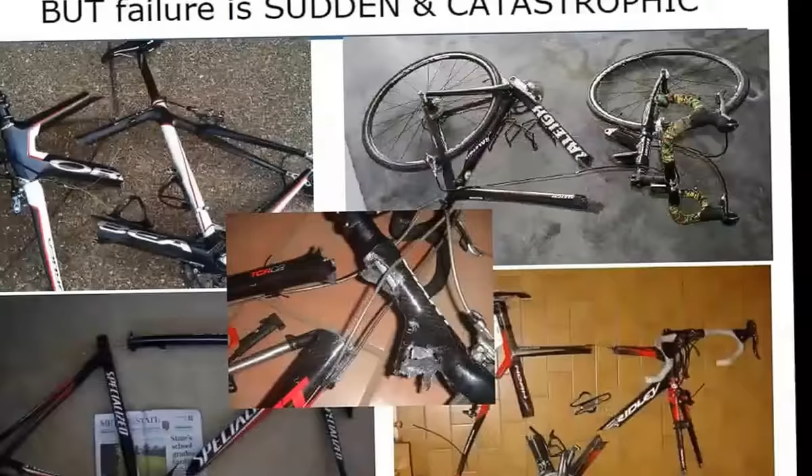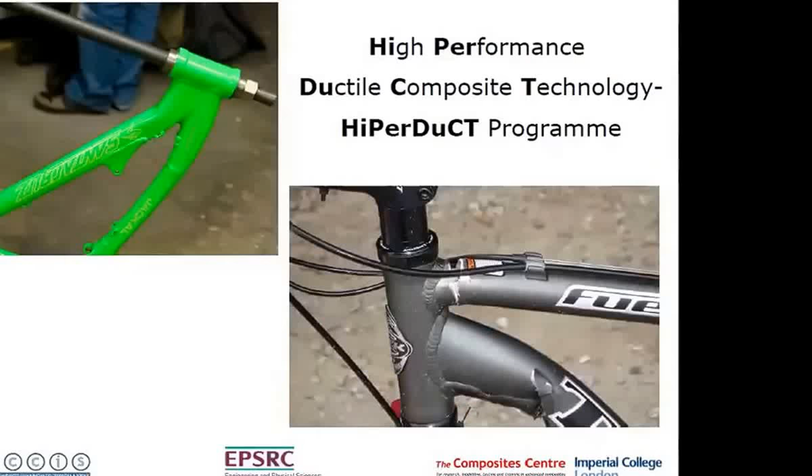Okay, right. So carbon fibre epoxy composites - they're wonderful materials, very stiff, very strong, lightweight - but the snag is that when they do go, it tends to be with a bang and you get a lot of broken pieces. So that's really the key challenge of this HiPerDuCT program: to really look at that problem and see what we can do differently to try and overcome that limitation. So the question really was, can we actually achieve some sort of ductility in these materials, which are typically very brittle?

So that was the basis for this HiPerDuCT program, which was on high-performance ductile composite technology. It's a joint program between Bristol and Imperial, with quite a number of postdocs and PhD students over a number of years, following various different streams. I'm only going to touch on some of the work this morning that came out of that project.

So really, what we wanted was the benefits of composites in terms of performance, high performance, but some of the advantages of metals. For example, an aluminum alloy, which shows this nice gradual response with a ductile failure. Can we actually marry those in some way and get the benefits of both of those characteristics?

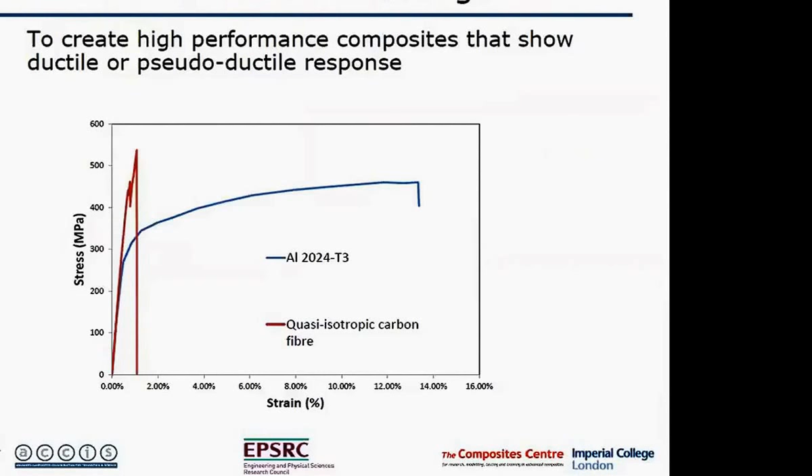So on this project, we've looked at various different approaches to achieving ductility or pseudo-ductility at different scales. One area is by looking at fiber reorientation, so you have angle plies, and then you pull them up, and you get a scissoring effect. You can generate additional strain, additional excess length, which can produce strain on top of the basic elastic strain of the fiber. That's one way where you can produce some non-linearity and some pseudo-ductility. Not going to talk about that today.

The second mechanism is by using strength dispersion, getting actual failure within the material, and one of the mechanisms there is ply fragmentation, and that I'm going to talk about extensively over the next half an hour.

We can also generate additional strain by having discontinuous fibers, different discontinuous composites, where we get a slip interface. That again can yield additional strain, and we've done quite a bit of work on that. But again, I'm not going to cover that this morning. And then the Holy Grail, which is ductile fibers. Some of the work at Imperial College was looking at producing fibers which themselves exhibit a ductile response, and they got some very interesting initial results on that as well.

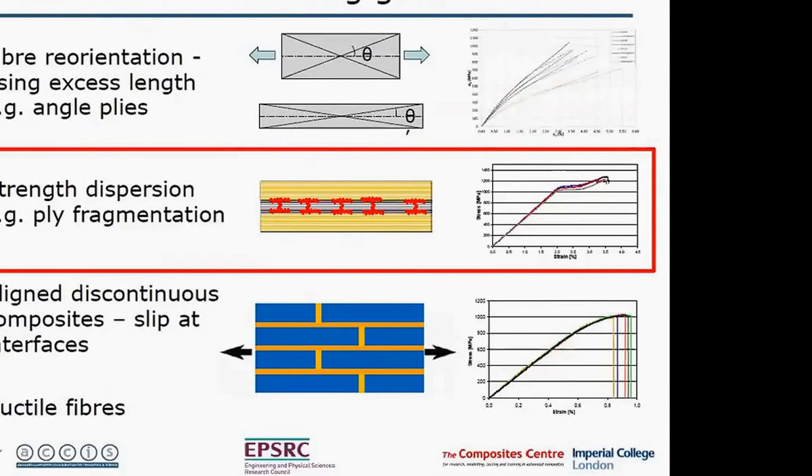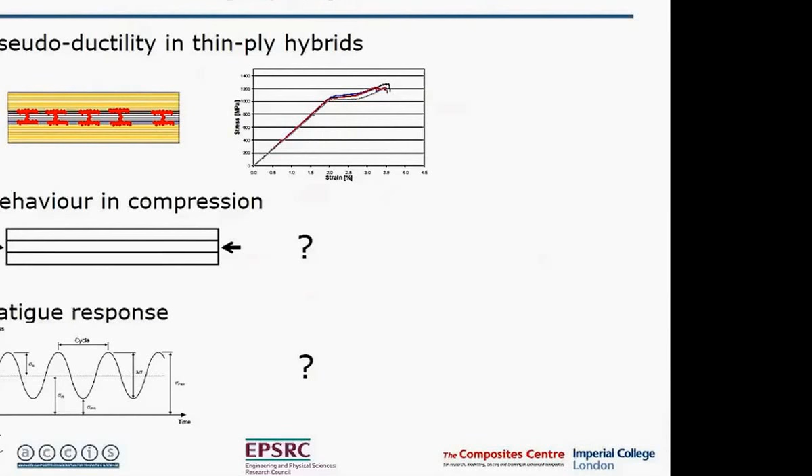So for this presentation, I'm going to talk about this main mechanism, the strength dispersion, and in particular, I'm going to look at hybrid composites. How can we generate ductility through having thin-ply hybrids? We've done a lot of work over that over the years. I'm going to summarize briefly some of the results on tension. Much of the work earlier on was done looking at tensile response, but what I want to focus on a bit more today is the behavior in compression of these hybrid composites, and also how they behave in fatigue.

So, pseudo-ductility in hybrid composites. In a hybrid composite, you start off with a high strain material, for example glass, which has a lower modulus but a higher strain to failure, and then you have a low strain material, which might be carbon, which has a higher stiffness but a low strain to failure. You put them together to form a hybrid, and if you do it right, you can get this sort of stress-strain characteristic, whereby you get an initial elastic response, and then you can get a plateau-type behavior as this pseudo-ductility mechanism comes in.

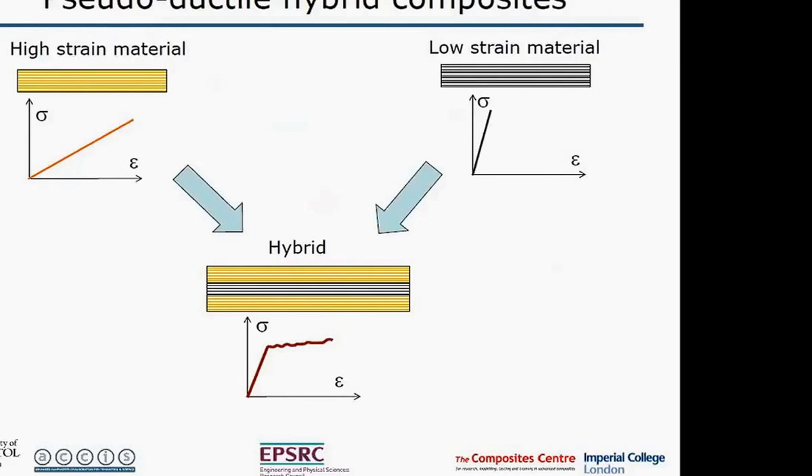But you only get that if you do things in a particular way. That's not the typical response of normal hybrid composites. So it all depends on the way that they fail, and understanding the failure mechanisms and tailoring them so that you get that response is absolutely key, and that's what we've been extensively researching for this project.

So hybrid composites can fail in different ways depending on their configurations. Just thinking if I can put this up here, if I'm not too far from the microphone. Yeah.

So, let's assume this is a carbon-glass hybrid, so we've got carbon in the middle and glass on the outside. If we have too much carbon, then when you load it, as soon as the carbon breaks, the whole thing fails, and you get a catastrophic failure. So you get a linear elastic response, as you would for a normal composite material, then catastrophic fiber failure. If you use less carbon or more glass, then when the carbon breaks, you just get a catastrophic delamination. So again, you get a load shock at that point.

However, if you use thinner plies, you can suppress the delamination. And with thin plies and with the right ratio of carbon to glass, you can get a situation where after you get one failure in carbon, you can then get another failure, and you get this multiple fragmentation behavior.

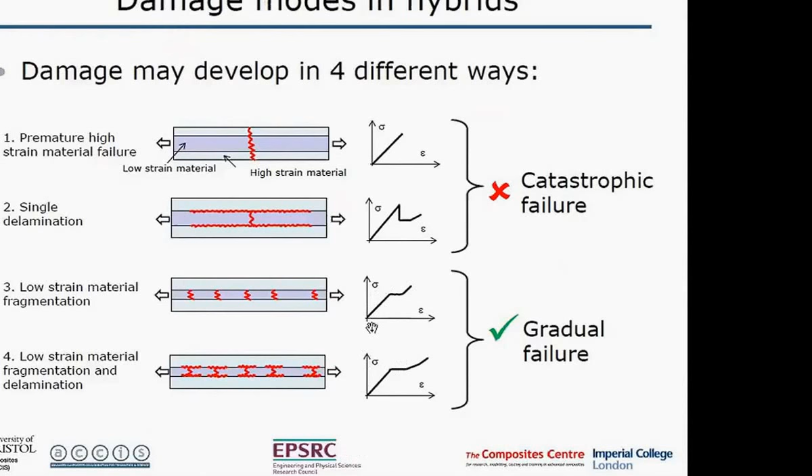And in some cases, accompanied by a little bit of localized delamination. That gives you this plateau on the stress-strain curve and this gradual failure as a result of this fragmentation taking place within the carbon. So that's the mechanism we want—this plateau on the stress-strain curve—and we can achieve that by the right combination of properties to get that fragmentation behavior.

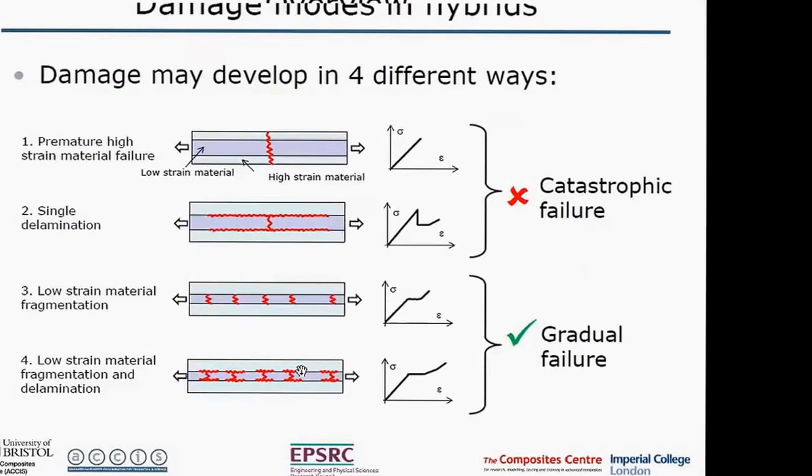We've done a lot of modeling of this, and this damage mode map shows parameters which control it. So there are two main things which control the hybrid behavior. One is the layer, the absolute thickness of the carbon, because that's what controls the delamination. And one is the proportion of glass and carbon.

So if we have too much carbon, then we get this catastrophic premature failure of the whole thing when the carbon breaks. On the other hand, if the carbon is too thick, then we get this delamination mechanism. But if we have sufficiently thin carbon and not too much of it, then we can get either this pure fragmentation mechanism or this fragmentation with localized delamination. And that's what gives us a pseudo-ductile response.

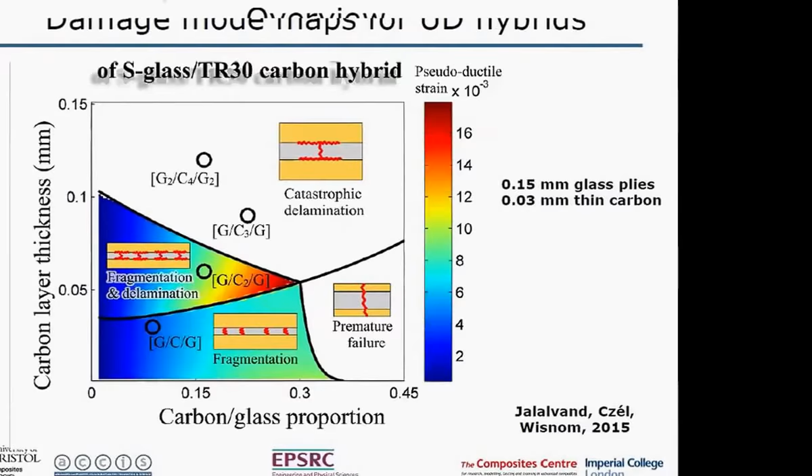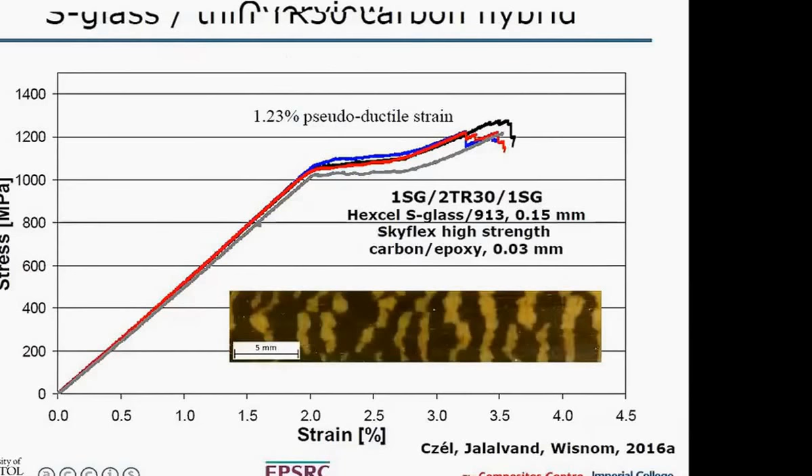So this shows one example here, where this is the same material, which is S-glass, standard thickness, with these thin TR30 high-strength carbon fibre plies. And you see we get this plateau here on the stress-strain response, with in this case 1.23% pseudo-ductile strain. We're defining the pseudo-ductile strain as the extra strain we get over and above what you would have with an elastic response at that same stiffness. So the distance on this plateau is what we're referring to as the pseudo-ductile strain.

One of the other things which is interesting about this type of material is that you get this striped pattern here. The material is originally black. When it fails, you can just about see these cracks in the middle of these regions here. These are the cracks in the carbon, and then you get a little bit of localized delamination, and that produces this stripe pattern. Because once you get a bit of delamination associated with those carbon fragments, the interface within the material reflects the light, and you get this yellow pattern.

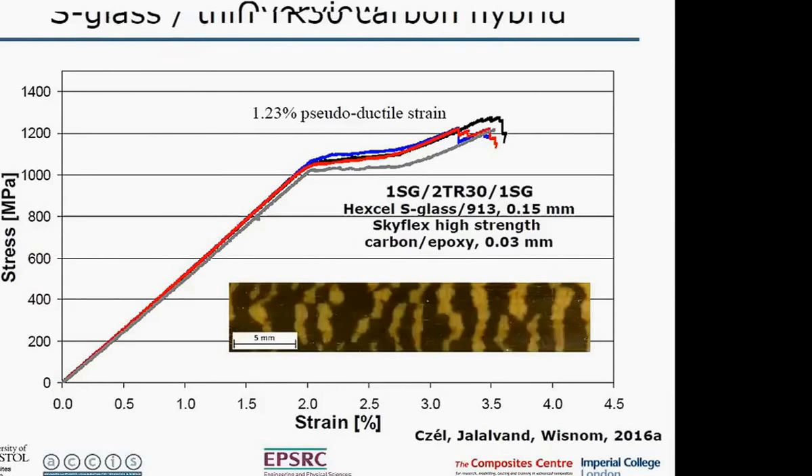So this is quite interesting because as well as generating the pseudo-ductility, it can be used as an overload sensing mechanism. This is something we've also been doing quite a lot of work on, how we can exploit that to not only get this pseudo-ductile response, but to actually have either a surface layer on the structure which indicates overload, or a discrete sensor which can be bonded on. It can be bonded onto metal structures, or it can be composite, to give an indication when a certain strain has been exceeded. It can also be used for looking at fatigue response as well—that's a whole other story which I'm not going to talk about today.

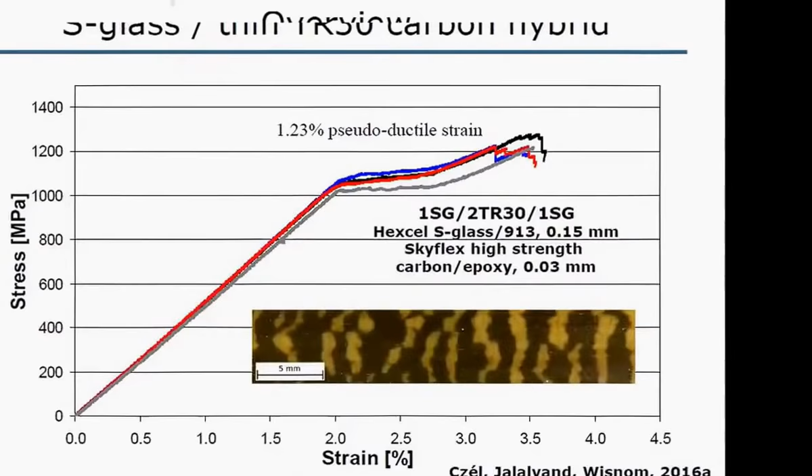You can do the same thing with, okay, this just shows what happens when you unload it. It's actually a different combination of materials, but when you load it and then unload it, initially up to about 1.5% strain it's just elastic, there's no damage, it just goes back down the same line. When you exceed the fragmentation strain, when you exceed the strain where the carbon breaks, then you've got a reduced stiffness because you've got damage.

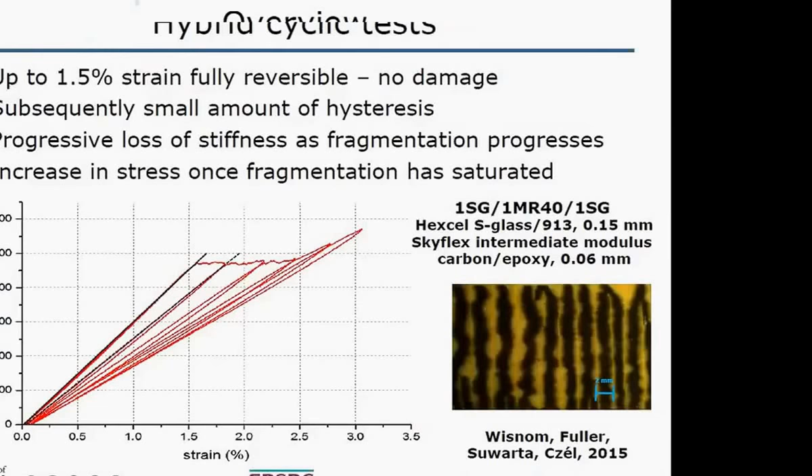So this is pseudo-ductility. It's not true ductility, it's pseudo-ductility because we've got damage, so we've got a reduction in stiffness and a little bit of hysteresis. Then when you get to the end of this plateau, where fragmentation is saturated, the stress starts to pick up again. This is where we're getting additional stress carried by the glass after the saturation of this fragmentation mechanism.

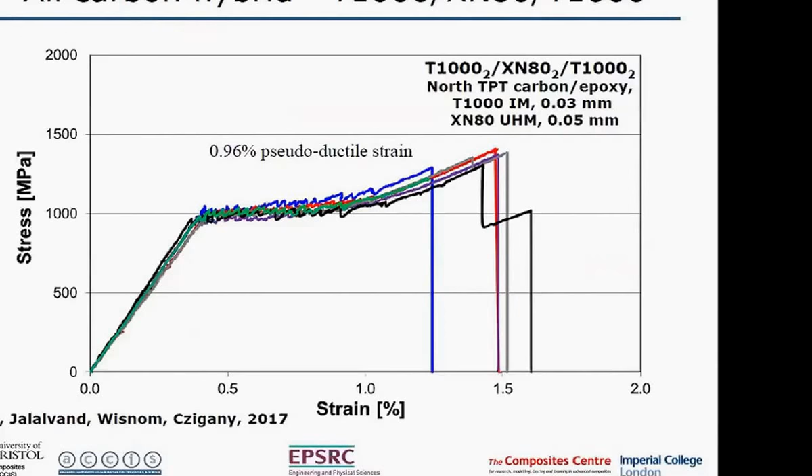So that's with the glass carbon. But we can do the same thing with different grades of carbon. This plot here shows an all-carbon configuration where we've got T1000 and XN80. XN80 is a very high modulus fiber, and we've got that sandwiched between T1000, which is an intermediate modulus, high strength fiber, and you see we get the same sort of pseudo-ductile response with initial elastic response, this plateau where we get fragmentation, and in this case about 1% pseudo-ductile strain.

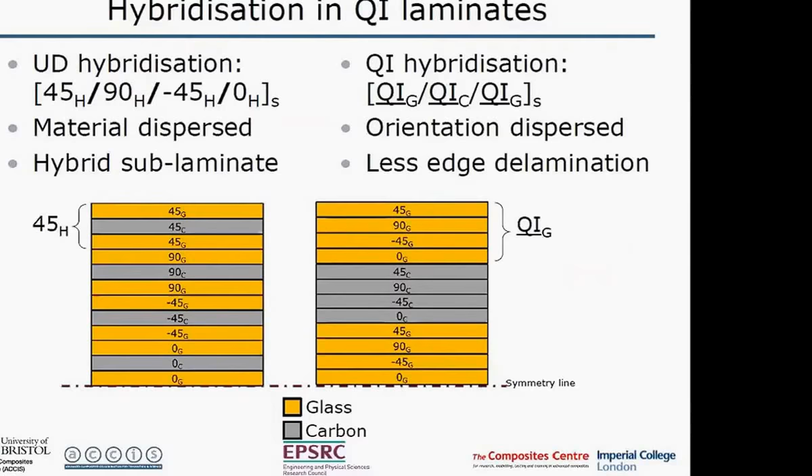But I'm going to show you some results now from this configuration. So here we've got actually a 0 plus or minus 60 configuration where we've blocked with glass together. So we've got a block of glass, quasi-isotropic, and a block of carbon. This glass is standard ply thickness, this carbon is thin-ply, and then we get the same sort of non-linearity with a bit of a plateau region here, similar to what we saw with the UD.

So what we see with the unidirectional composite carries across to what we see in the quasi-isotropic. And it's interesting to see we can load it in any of the directions and get a similar sort of response, although there is a bit of a difference between this red one, which is loaded in the 0 direction, and the ones which are loaded at 60 degrees.

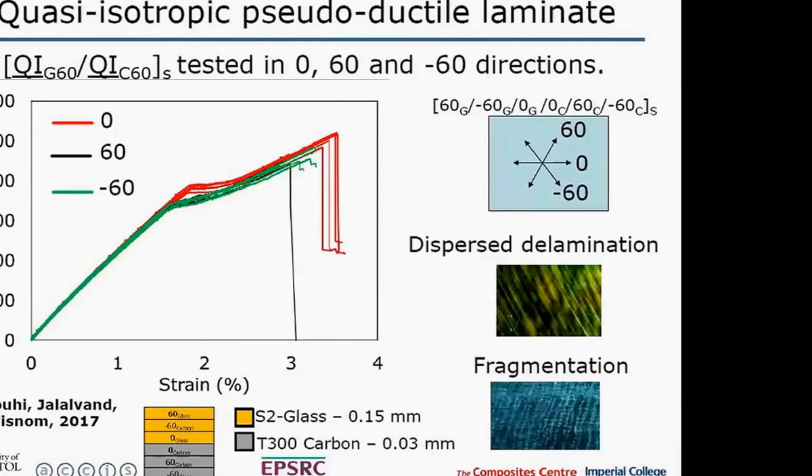And that's another very interesting phenomenon which I could spend the whole time talking about related to hybrid effects. One of the other things we see with these hybrid composites is that we can see an increase in strain at failure in the carbon, and that's because the glass adjacent to it actually inhibits the formation of critical fiber clusters. We get an increase in the strain at failure, which can be quite significant - it can be at least a 10% increase in the strain at failure.

In this case, in the 0 configuration, that 0 carbon is next to a 0 glass, and that produces a higher hybrid effect than if it's in the other configuration, where the 0 is actually next to a 60, and therefore it doesn't get quite so much constraint when the adjacent plies load, and you get that difference in the failure strength. So that's a whole other interesting thing that's come out of this program, understanding hybrid effects and how we can take advantage of them to actually get higher strengths of failure in the carbon in these hybrid configurations.

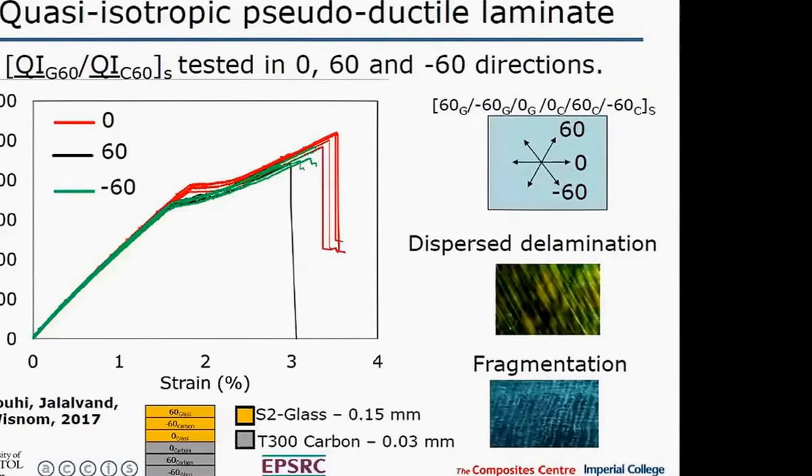So we can get a quasi-isotropic response with pseudo-ductility in any direction, and indeed off-axis we also get a pseudo-ductile response as well. And we get the same sort of failure mechanisms that we see in the UD, with dispersed delamination and fragmentation occurring in the plies.

One of the whole points of this was to see what happens when you go to a notch response, because the thinking behind this pseudo-ductile response was that if you've got this ability to redistribute load, it should be less sensitive to notches than conventional carbon fiber composites, which show a big reduction in static strength when you put a notch in them, a stress raiser.

And that's exactly what we see. This is open hole tension and sharp notch response on the same quasi-isotropic laminate I showed before. The red is the unnotched response, as we had before. Now if we put a hole or a sharp notch in it, we see the same response up to this point, and then we get failure.

So the important thing is that the failure is occurring locally, fragmentation is occurring locally at the hole much earlier, right down here. At this point we've got enough stress at the edge of the hole to start it fragmenting, and then all along here we're getting gradual fragmentation and load redistribution, until once the whole section has fragmented, we get failure of the whole thing.

So this pseudo-yield stress is reached quite early on, then we get a gradual increase in fragmentation around the notch. On these plots you can see what we're actually seeing is the delamination associated with that. Even at this strain there's quite a bit of fragmentation which you can't see so much, but it's gradually increasing until you get pseudo-yielding across the whole cross-section, at which point you get the load drop.

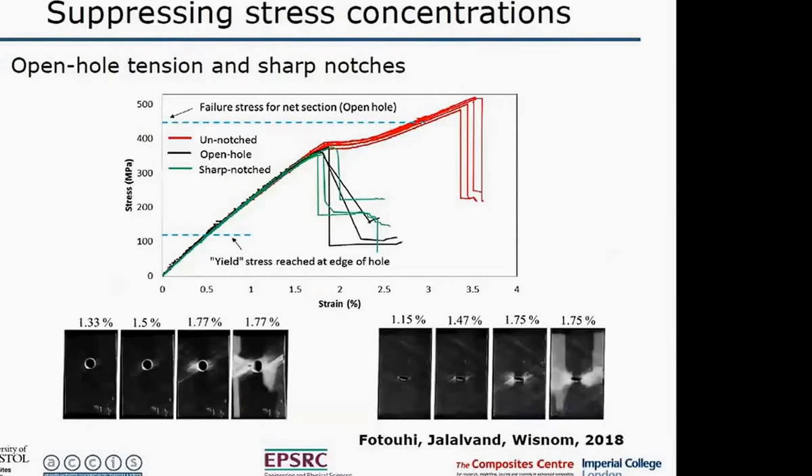So this was pleasing. This was the whole premise of the program, that by introducing the pseudo-ductility we could reduce the effective stress concentrations, and it seems to work very well.

So then the next question is, what happens in compression? When we started this program, we thought this is a good thing — we've got a pseudo-ductile response in tension, but surely it's not going to work in compression, because you haven't got the same mechanism of fragmentation, or have you?

So we initially investigated that using these beam specimens — a 4-point bending test with a 2.7 millimeter glass epoxy beam with a layer of hybrid on the surface. Here we've got a glass-carbon hybrid just on the compression surface, the same material we looked at before, with standard glass applied on the surface and 0.06 millimeter of M55 high modulus carbon underneath it. We put it under 4-point bending and measured the curvature using dots on the edge of the specimen, then used that to determine the strain and look at the overall response.

And what happens? Well, we do get fragmentation. We get this change in slope — the M55 fiber failure stress in compression is about 0.5% strain, and you can see at this 0.5% we see a change in slope due to fragmentation, and then it goes up to 2% where we're getting overall failure occurring. So we are getting this change in slope due to fragmentation in the carbon, which was initially a bit of a surprise. We weren't necessarily expecting this to work in compression, but it does.

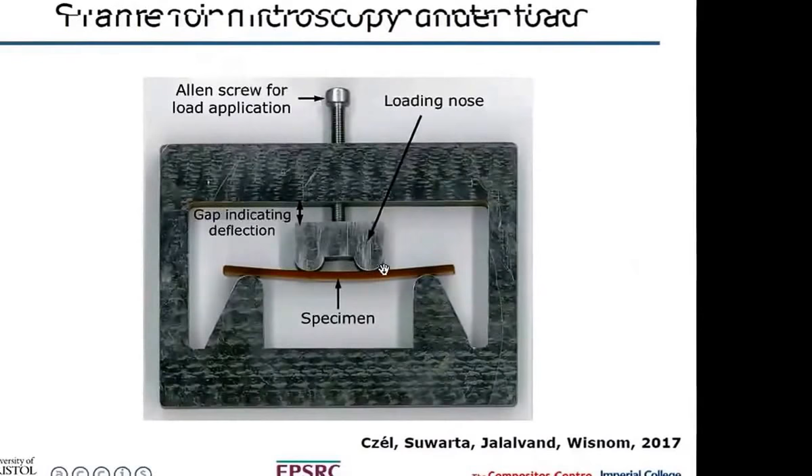And what's going on? Well, we investigated this using a little rig here to enable us to put the specimen under load and see what's happening when it's under load, so we could put it under the microscope to look at the mechanisms, what's actually happening in the fragmentation.

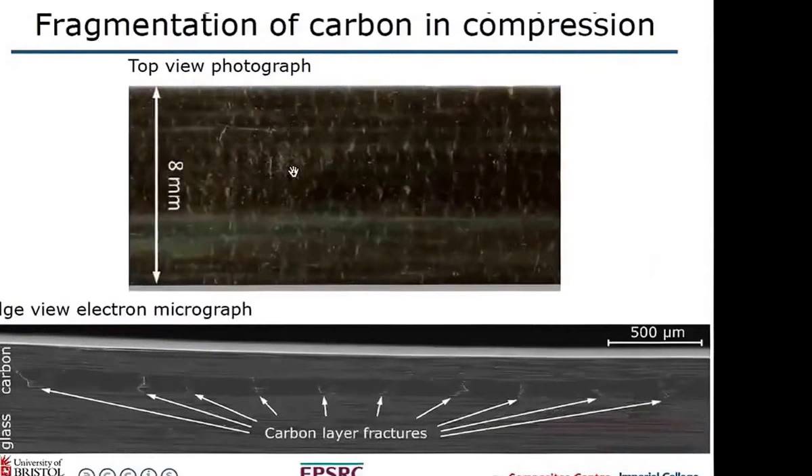This shows the overall top view. You can see, not quite so clear as in the tension case, but you can see these little flecks, which are fragmentation and local delamination associated with those fragmentation events in compression. On the bottom here you can see the surface ply when it's under load, at about 1.2% strain. You can see these fragmentation events periodically along the length of the carbon ply — we're getting the same sort of fragmentation in the carbon even when it's loaded in compression. The pitch of these fragments is quite close.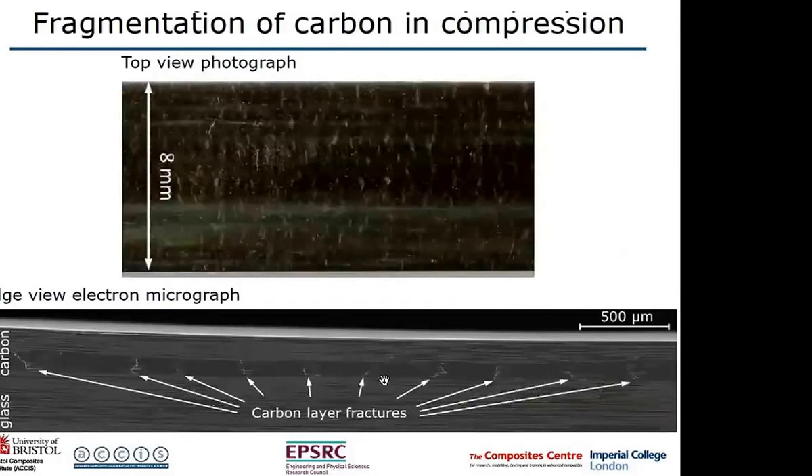We measured that. If you do a typical calculation for tension using a shear lag type equation, working out what length is needed to get the load into the fibre, you find the critical ply length is about 1 millimetre. But actually the distribution of these fragments is much less, about 0.5 millimetre on average, with some going down to 0.2 millimetre or less. So these fragments are much, much closer together than that critical length.

What that tells you is that these fragments do not affect the load carrying. It's still got carbon, it's still carrying load. It's not like it's completely unloaded here - you've got to load it up by shear to get enough load in to break it again. It's still carrying load and therefore can break at the next weak point along the ply, where the critical failure mechanism can start.

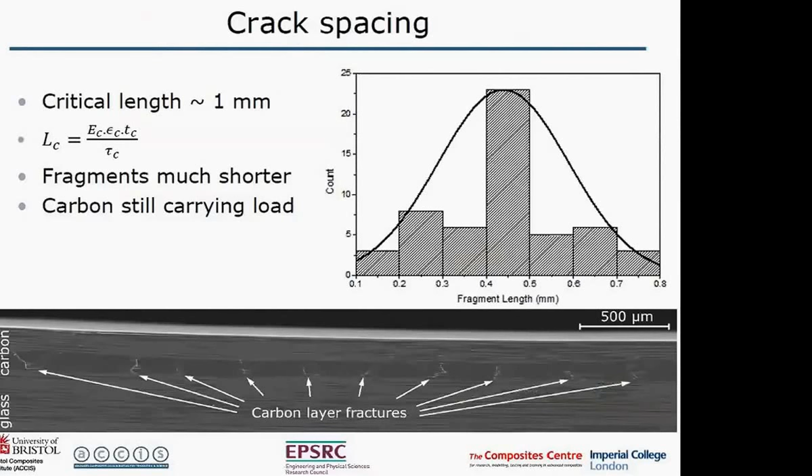So if the carbon still carries load, how does the fragmentation work? It was a bit of a puzzle at first. If you look at this plot here, using this rig, we can look at it unloaded, and then load it up, in this case to minus 1.2% strain.

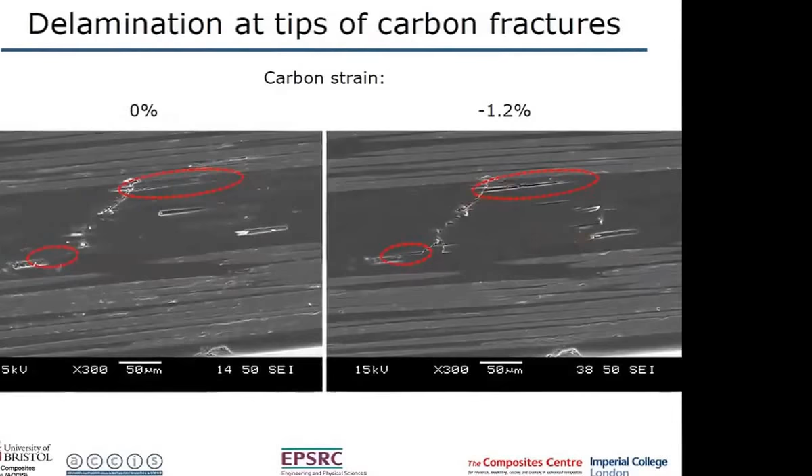So you can see here, this is the fragmentation crack. The fibers have broken at an angle - a bit variable, but it sort of looks like a shear crack. At the top here, if you compare this one with over here, you see it's opened up - there's a bit of a delamination crack down here. The fibers are broken in compression, and because of that angle, they're able to force each other apart to get a little bit of localized delamination.

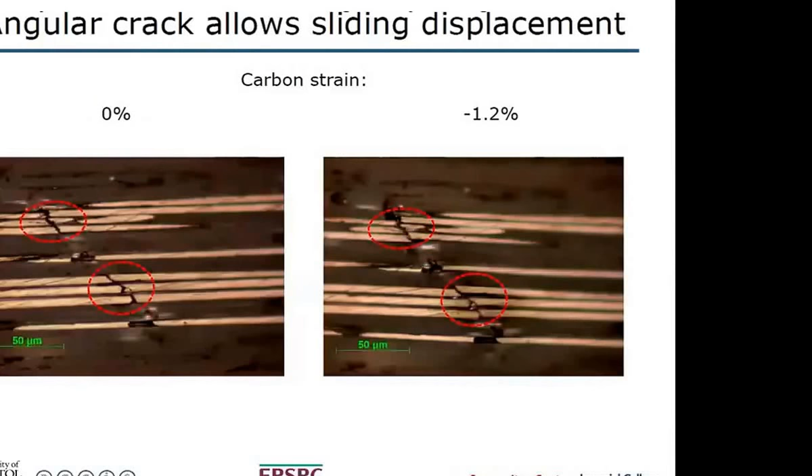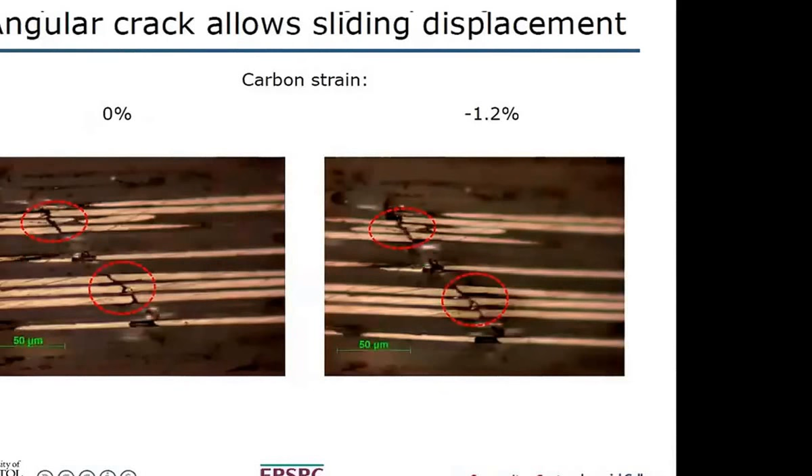If you look at this lower fragment, on the left-hand side you can see the orientation of the fibers. And if you look at this one, you can see how it's moved upwards versus this one. But also, because of that roughly 45-degree angle, it's moved in this direction as well. So you can see how that wedging action, pushing out this way and producing a bit of delamination, enables a change in strain in the fiber direction to occur. That's the mechanism by which this fragmentation behavior can occur.

Looking at it schematically, this angled crack, when you've got sliding occurring across it, pushes the composite apart here. You get a little bit of delamination, mixed mode delamination here. That allows some relative motion, which allows the strain to change even though the load is not changing very much. As this fragmentation progresses, the carbon is still carrying about the same load as when it started to fragment, but it can strain because this mechanism allows relative motion while still carrying the load.

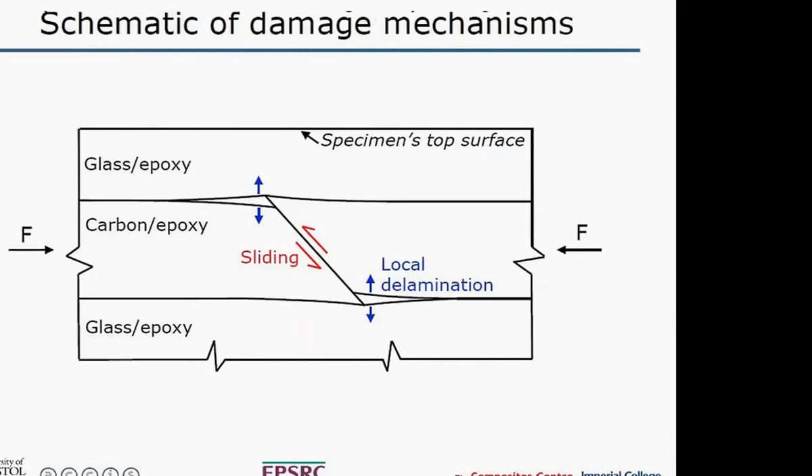I think it's quite interesting to get to the bottom of this and how it behaves. Then we went on to look at what's happening to...

So now we've done some tests on the same M55 S-glass materials, with the same thin M55 and standard glass materials as before, loaded in direct compression in this Imperial College rig. The layup is S-glass, carbon, S-glass, but this time we've changed the number of carbon plies - we've done 1, 2, or 3 carbon plies together in this block, repeated 17 times. So in this hybrid we're varying both the proportion of carbon to glass and the thickness of the individual carbon plies, to see how that affects the compression behavior.

So what's happening in those cases? With the 3 carbon plies, at this point you get a catastrophic failure. It's failed in compression, and it's also extensively delaminated. It's a bit hard to see which happens first. Basically, more or less as soon as it fragments, the whole thing fails.

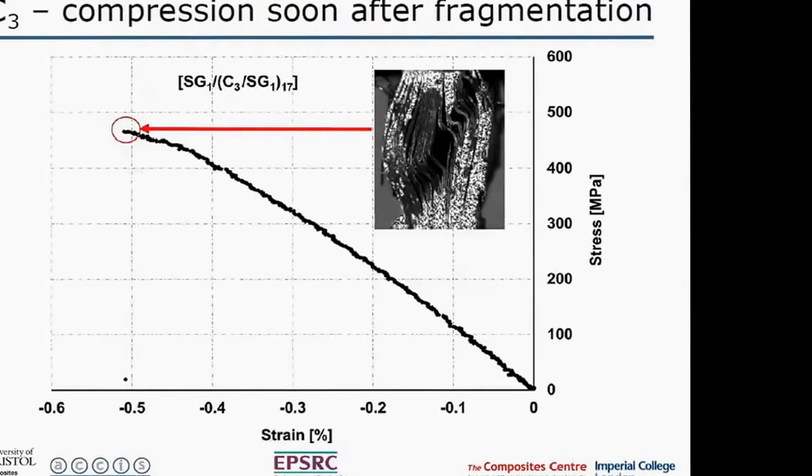When you have less carbon plies, in this case only 2, past the fragmentation stage we get this increase in load, which is now the glass taking more load. The carbon is carrying about the same load all the way through, but the glass is taking more load. That's why the slope is much lower, because that's effectively the slope of the glass plies.

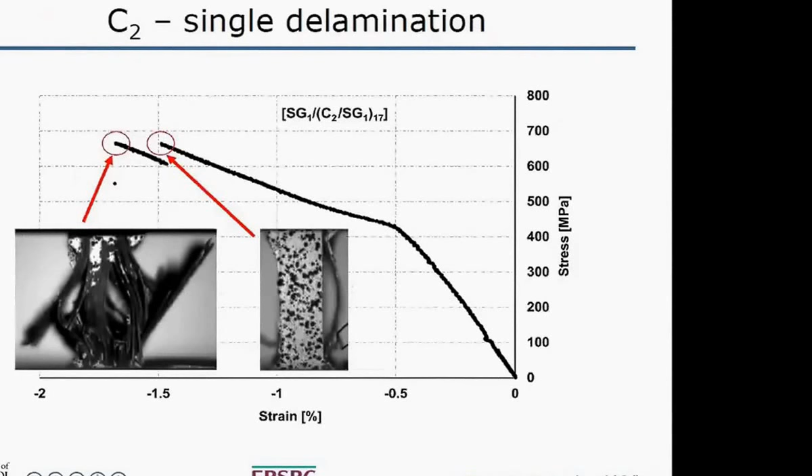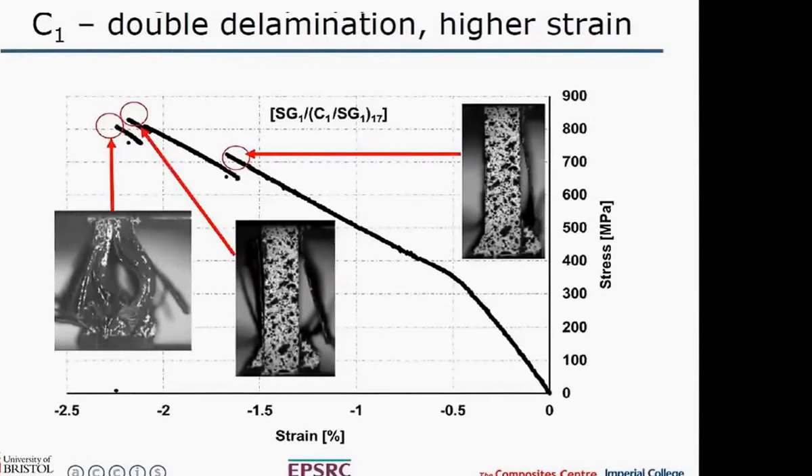Then at this point we get a load drop, and that is actually the surface glass and carbon ply delaminating. It goes a little further, and then the whole thing fails catastrophically at this higher strain. If we go to the single carbon block, we have the same trend: first one load drop here, then a second load drop where the other side delaminates on the surface, and then we get this catastrophic failure shortly afterwards.

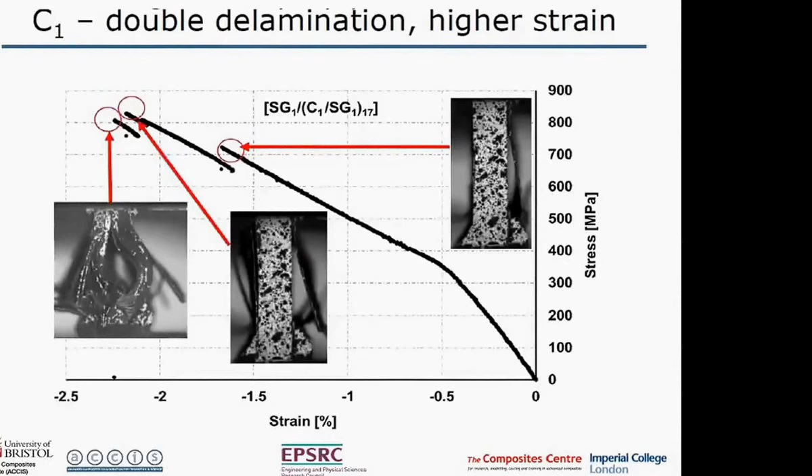The strains here are quite a bit higher than they were with the ones with the thicker carbon. So we're seeing the same trends qualitatively as we saw in tension, that the thickness of that carbon ply is important in controlling when and if you get delamination.

Just as we saw in tension, with thin carbon plies—1 or 2 in this case—we get it going beyond the fragmentation and we get this delamination occurring. But when we have thicker blocks, it presumably delaminates and then fails in compression straight away as soon as it starts to fragment.

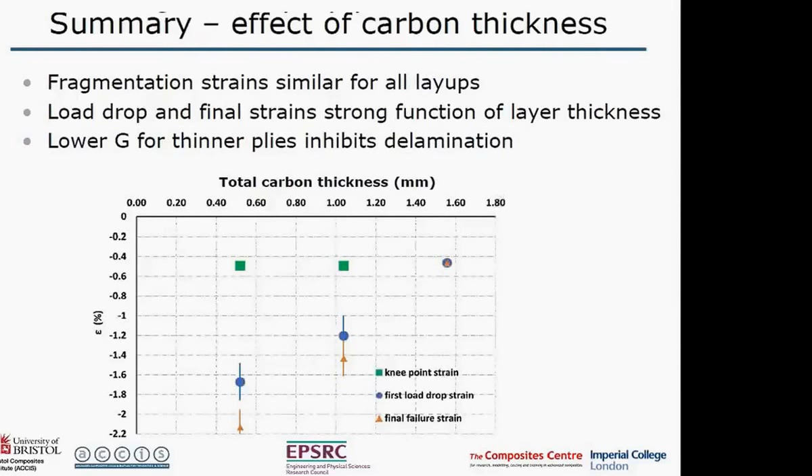So that's really a summary of where we've got to on looking at the compression failure mechanisms. And since we do see this gradual failure in compression, we should see the same sorts of effects in notch behavior, although we haven't actually tested that yet in compression.

So now let's go and talk about fatigue. I'm switching now—we've used lots of different materials in this program. One of the problems we've had is that the supply of materials is not as extensive as we'd like. We have to choose whatever materials are available rather than necessarily what we'd actually like.

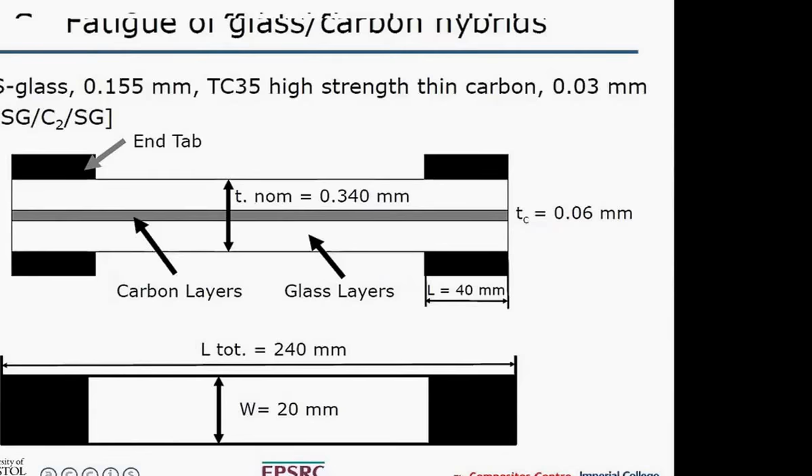In this case, we've used TC35, which is a high-strength conventional standard modulus carbon fiber. Again, it's thin-ply, 0.03 millimeters, and we use the same S-glass standard ply thickness. For this work, we've got one S-glass ply and two plies of carbon, so it's 0.06 millimeters carbon and one S-glass. These are quite thin specimens, and we've loaded these statically and in fatigue.

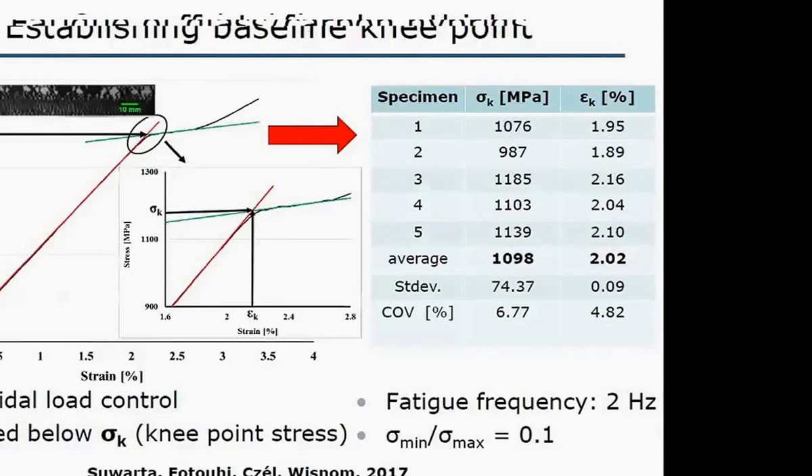Then we do the fatigue under load control below that point. We're taking pristine material initially, and we fatigue it at, let's say, 80 or 90% of that knee point strain to see how it behaves. This is done under load control, sinusoidal fatigue loading with a 2 Hz frequency and an R ratio of minimum to maximum stress of 0.1.

What we see is that at 80% of that knee point strain, there's no visible change in stiffness or damage up to 100,000 cycles. This plot shows normalized stiffness against cycles, and a number of specimens have been tested running out to 100,000 cycles at 80% of that knee point stress with no damage. That's good, because that says if we're operating at that low point, we've got no problem with fatigue.

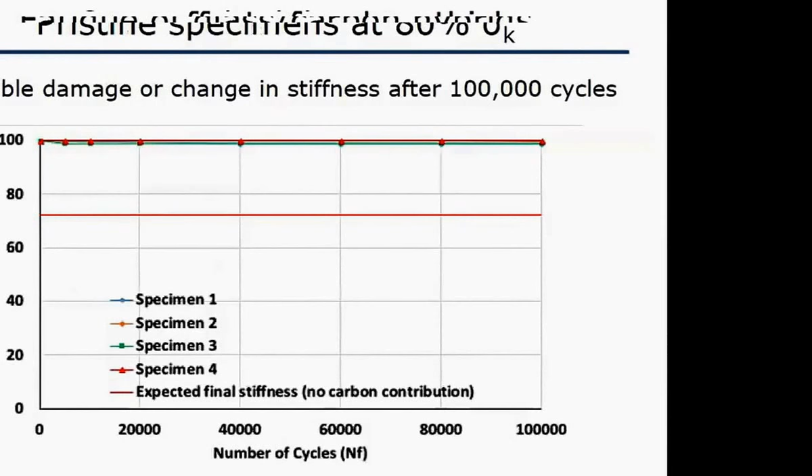The next question is, what happens if you overload it, go beyond that knee point, and introduce some damage, and then fatigue it? What happens then?

Before we get to that point, I've got some results here which show what happens at 90% of that knee point strain. We see initially no visible damage, but after about 30,000 cycles, we do see some degradation. So at 90% of that knee point strain, we're a bit close to the limit. Although we haven't really seen the start of major fragmentation, we're quite close to it.

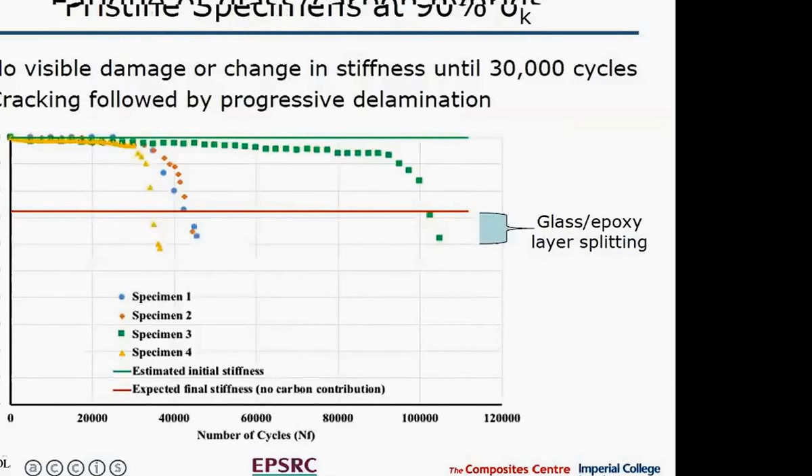So what happens if we overload it? In this case, it's been loaded beyond the knee point to introduce an initial fragmentation in the specimen, and then it's been fatigued at 80%, 90%, or also 70% of that, to see what happens to that damage after it's been introduced when we fatigue load it.

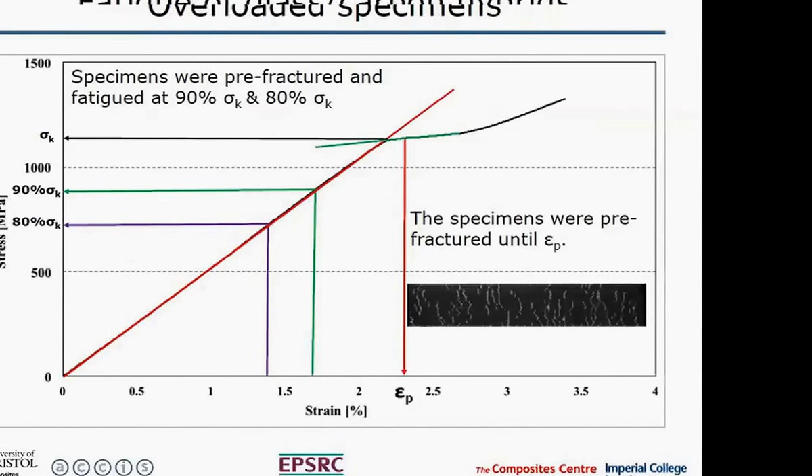What you see is some delamination growing. This is at 90% of the knee point strength, so it's overloaded, then we fatigue it at quite a high level, 90% of that knee point strain. Initially we've got 15%. We measure the delaminated area using the picture of it, the contrast between the delamination. The initial overload produced about 12% change of area, a little bit of delamination associated with these fragments. Then as we fatigue it at 90%, after a few thousand cycles, it delaminates.

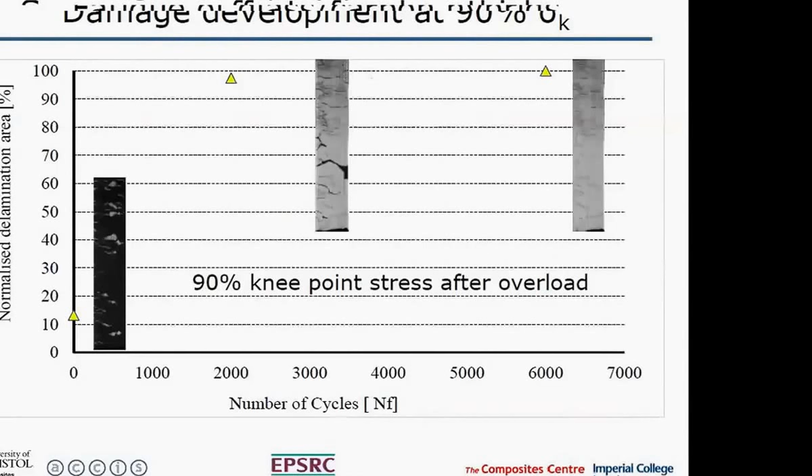And if you reduce it to 80%, it takes a few more cycles, but still over 7,000 or 8,000 cycles, we're delaminating. So because we've reintroduced that damage by initial overloading, it's a bit more susceptible and it does fail a bit more.

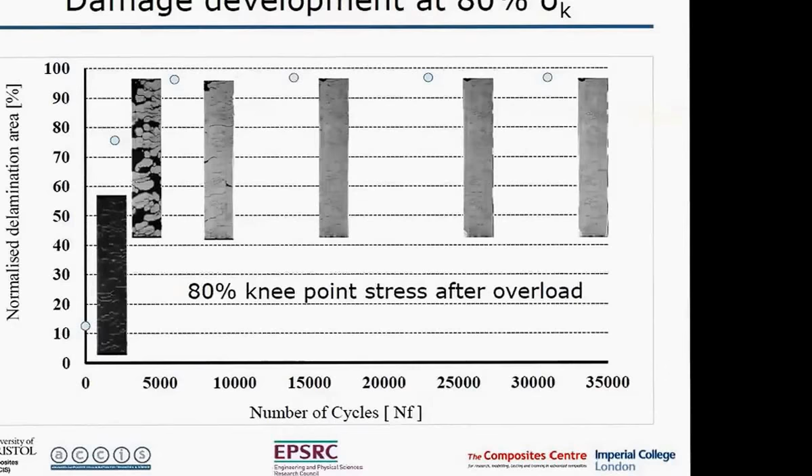But we can look at the overall summary here. This shows that at 70%, it goes out to quite a few cycles before it really completely delaminates.

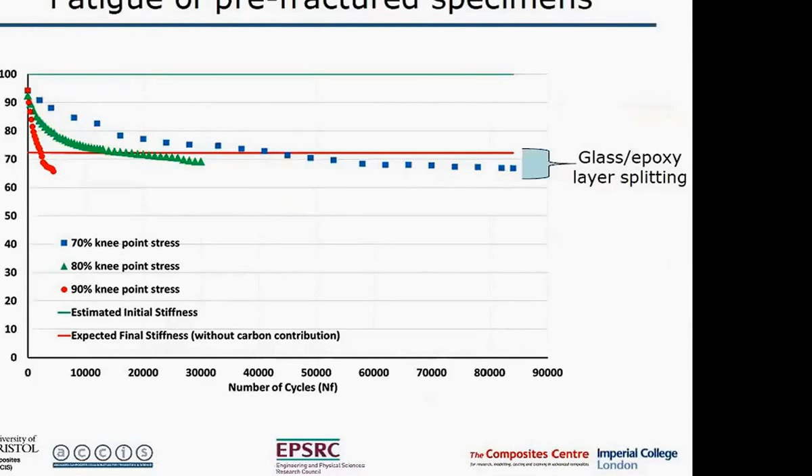So under fatigue loading, it is sensitive. But if you keep that strain low, the whole premise of this program was we want to be operating on that initial margin, on the initial linear slope. The nonlinear response is there to give us some margin. If you exceed the limit, you get the load redistribution, but actually we want to be operating largely in that linear portion. If you stay within that, keep the stresses and strains relatively low compared to that knee point, then you've got no trouble with fatigue either.

So in conclusion, what I've shown here is that the ply fragmentation causes pseudo-ductility, and as a result we get a notch insensitive response, which is really encouraging, that we want to see. What we've also found is that this fragmentation mechanism also occurs in M55 high modulus carbon in compression.

I haven't talked about what happens in other carbon fibers. We've also done this looking at high strength carbon fibers, and that could be another presentation. It's also very interesting because we have very high strains on standard modulus carbon fibers, and they don't fail. We measured this as high as 3.5% in a standard carbon fiber in this situation, which is extraordinarily high, and that's a whole other story.

But if we look at the M55, which is a high modulus fiber with a relatively low strain of failure, we see the same sort of fragmentation that we see in tension. We get these angle cracks, and those angle cracks enable it to still carry load, and the wedging action can cause delamination. So the failure strain in compression depends very much on that carbon fiber. We use the same sort of approach, damage mode maps, to understand that and to predict the response and to design our materials to have the right combination of properties.

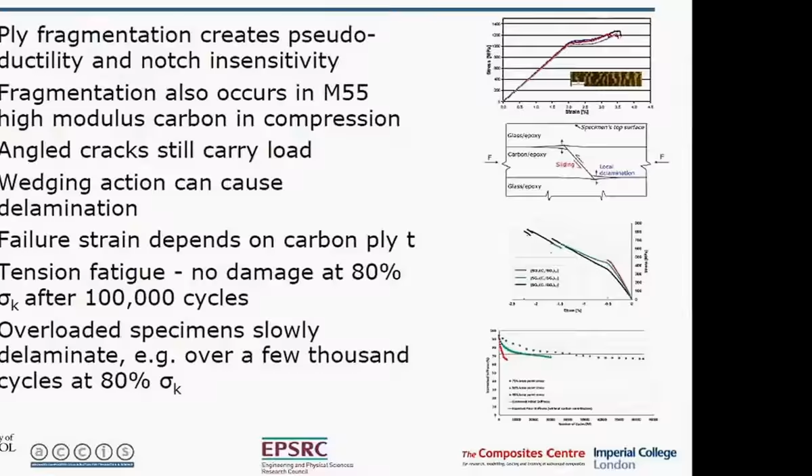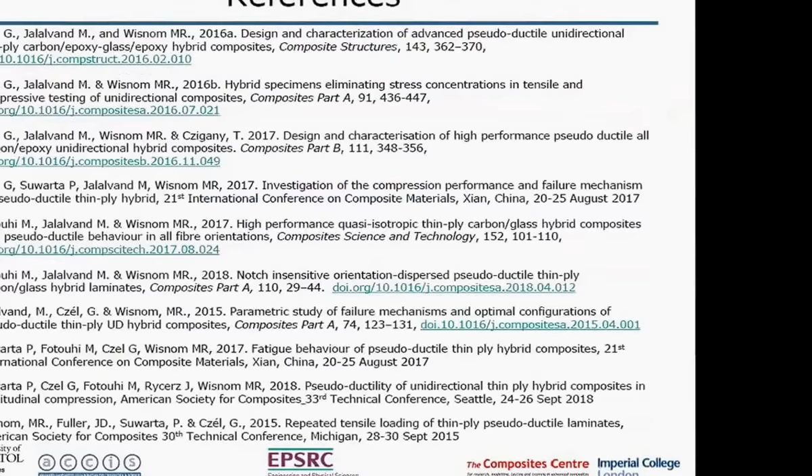Okay, thanks very much for that, Mike. Any questions, either via the telecommunications or from the room audience? Sorry, I missed the start of your lecture, Mike.

That's quite a complicated question. We've been doing a little bit of work looking at impact, haven't done so much yet. So it's quite complex to assess. Under the traditional impact situation, you get quite a lot of delamination, and the delamination may spread under cyclic load. So what we're hoping with this is to reduce the delamination. It's not quite clear at the moment whether that's the case or not, because we still tend to get quite a bit of delamination. We haven't optimized these situations yet to really look at that.

What we have seen is that we can change the damage under an impact situation quite significantly. We tend to get some delamination on the surface, which can help limit the overall later damage. And not only that, but it's also visible. One of the critical things with impact is that when you hit composites, you don't see much on the surface, and you've got this big reduction both statically and then potentially propagating into fatigue.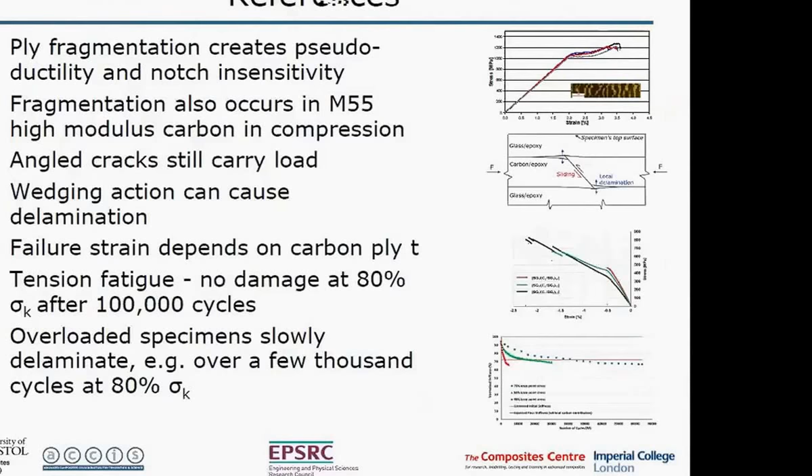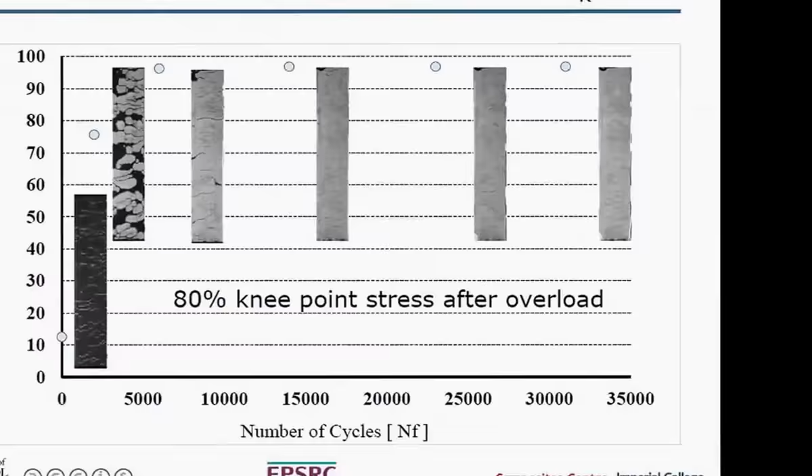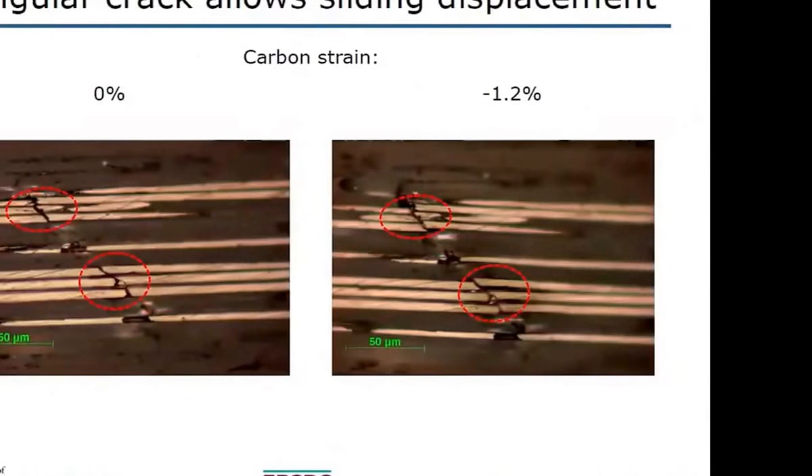So looking back to these ones here, the ones under tension, the tiger stripe, the multiple fragmentation from shear lag that we get, do they congregate within the adjacent carbon ply, or is it well distributed throughout the carbon ply in the hybrid specimen?

So it's pretty much distributed throughout the whole thing. So in that case, we're not seeing any failure in the intervening ply. There's sufficient margin between the carbon and the glass, so the glass does not fail.

Now, again, if you use materials which were closer in terms of strain, you might be able to tailor that. One of the things we've looked at in another part of the program is the whole idea of actually weakening the fibers locally, so that you might in situ generate a discontinuous composite. So it starts out with a continuous composite, you've got the modulus of a continuous composite. At a certain point, you periodically weaken the composite using lasers, then it breaks, and you might move towards a discontinuous state towards failure.

That was my follow-up question, because a lot of research has been done on using those discontinuous composites. Which one outperforms? My conclusion, some of my colleagues might not agree with this, but my conclusion is that the continuous ones are better because you see a better initial response.

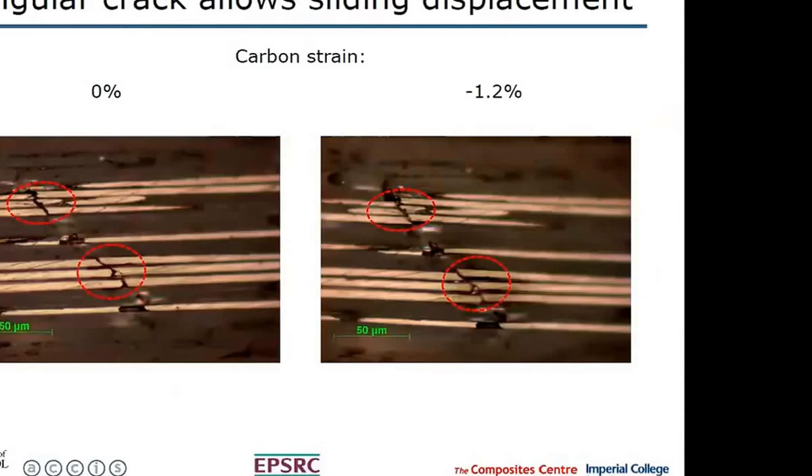Yes. We've got some follow-on funding for HiPerDiF, high performance discontinuous fiber composites. That came from this program, and then we've got a new research grant which just started fairly recently to take that work forward, to look at how we can scale up the manufacturing to get the rate higher, and then to look at that for producing feedstock for additive manufacturing. We'd like to be able to produce that. That's one thing - fiber placement tows, and a whole lot of other potential ideas of how we can actually exploit that technology. So it looks really quite interesting.

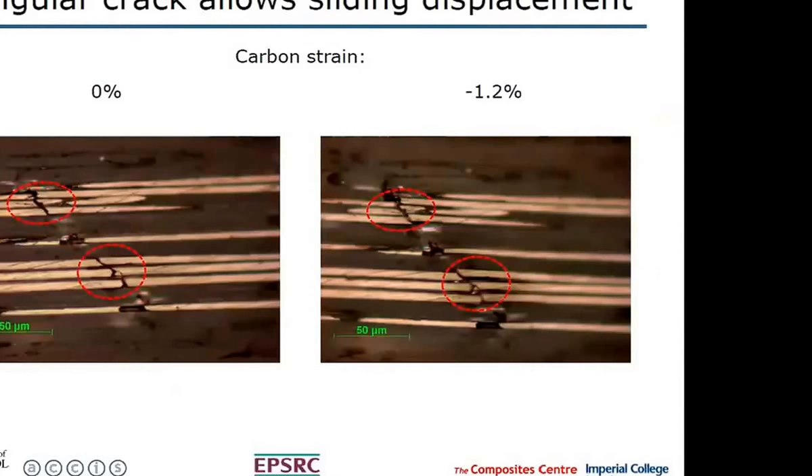Okay, look, I think we're pretty much out of time. But before that, are there any last questions from anyone online? No one's there? I've been talking to her. Sorry? No one's there. All right then. Okay, well, could you join me...